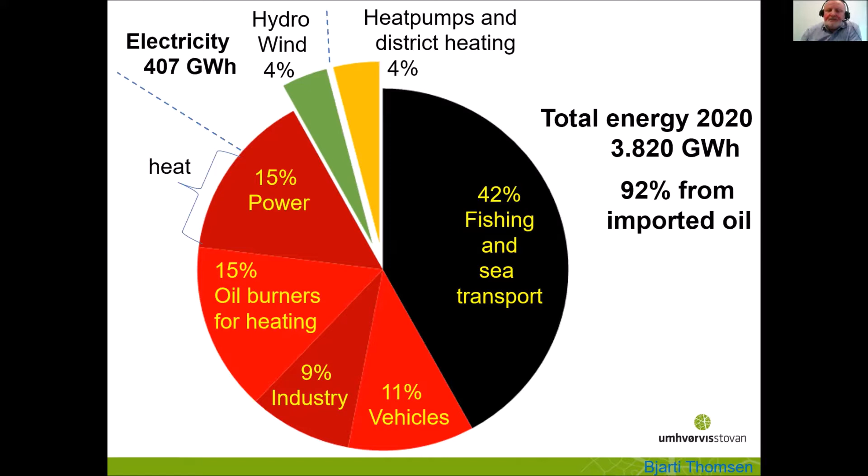And then power production is based mainly on oil. But we do have some hydro and some wind, and the wind is going to expand. And we are on our way to electrify all the transport vehicles, all the oil burners and all the power production. So we have the technology to change from oil to renewables. But as we change from oil to renewables for transport and heating, it will require that we almost double the power production.

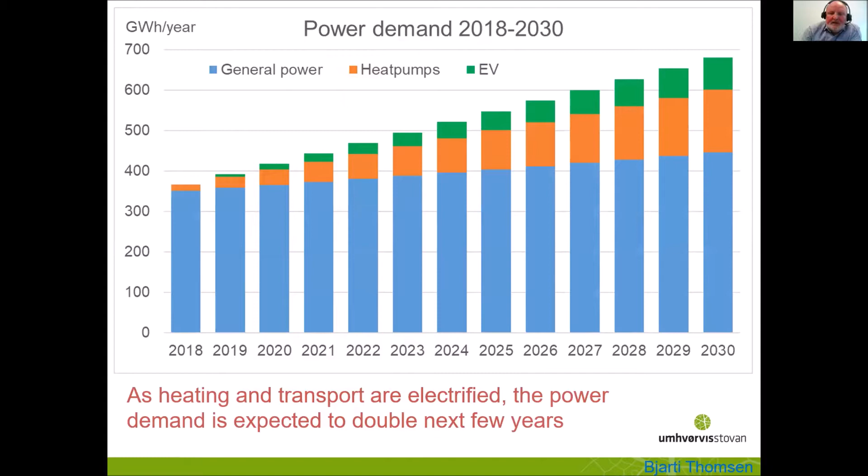And how are we going to do that? That will be mainly made by wind, because we have among the world's best conditions for wind energy. Most places where we can erect wind turbines, we have over 10 meters per second average for the whole year. So our future power production will mainly be based on wind energy.

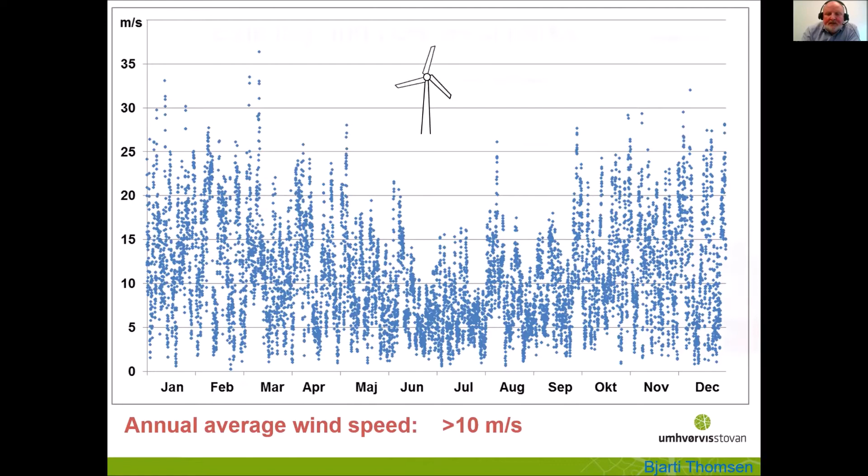And we are on our way. We have 4 small wind farms, and just recently, this year and last year, we licensed 3 bigger wind farms. So they have been committed. So we will actually more than triple the wind energy within a couple of years. But as you know, wind is intermittent and it doesn't produce all the time. It just produces as the wind blows.

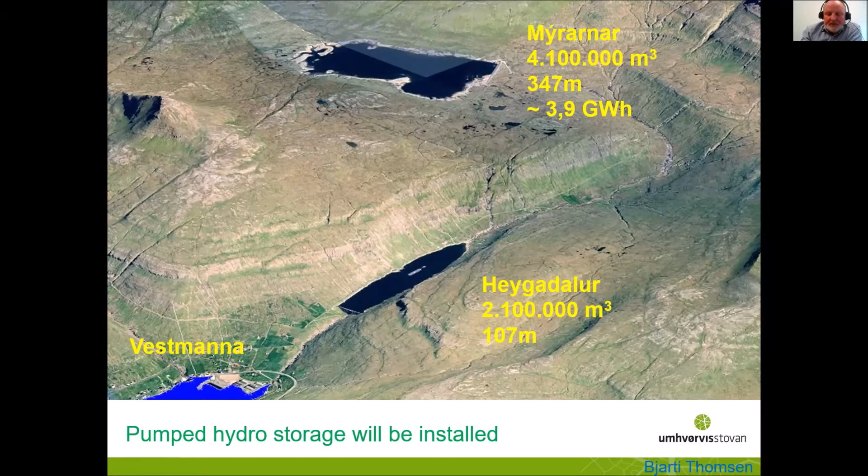So we need energy storage, and we have the option to use pump storage. As you know, most of the energy storage around the world is based on pump storage, where you use excess energy from wind or solar to pump water up to a higher height, and then you can run the water down again when you have less wind or when you require more energy. So this definitely will be an option for us, and we are in the process of building a pump storage in the electrical system. But we do have other options to store energy.

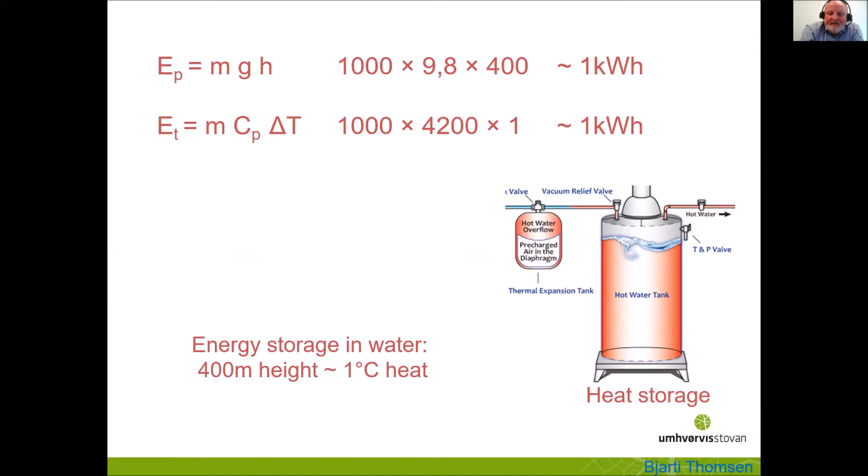Storing heat is a very efficient way to store energy. If you take 1,000 kilos or liters of water and you lift it 400 meters up in a pump storage, or you just heat it 1 degree, that's the same energy. So it's very, very efficient to store energy as heat. And it is used worldwide. We know the big heat storages in Denmark that are connected to district heating systems.

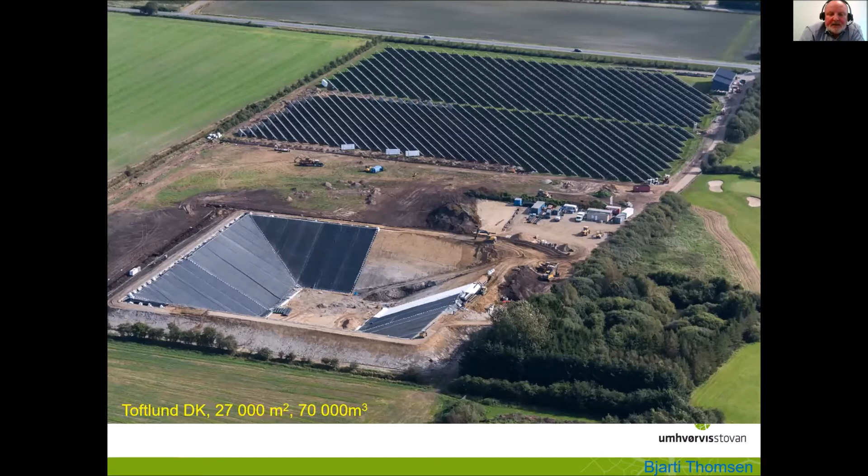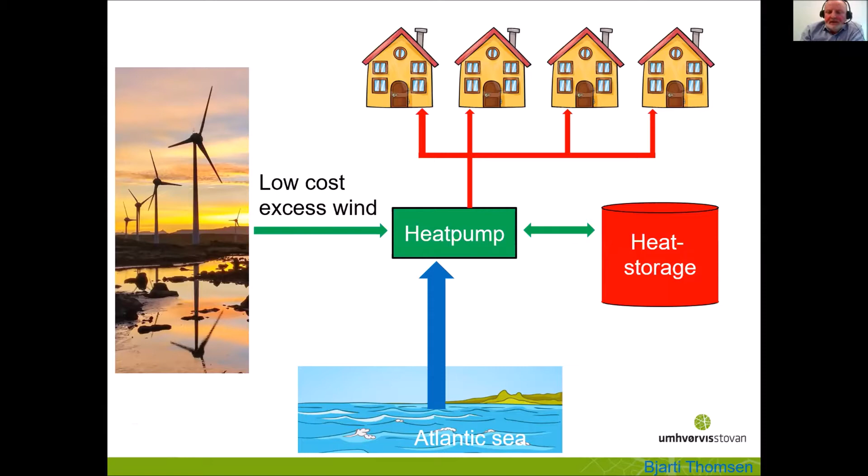And we are going to use similar systems where we can use excess low-cost wind, probably through a heat pump, maybe from the sea where we have a constant heat, and we can produce heat for all our houses, but we can also connect heat storages. So we have the option to store excess wind energy as heat. There are other options, but heating actually is a good solution for us, because the requirements for heating are almost a perfect match with the energy we can get from the wind.

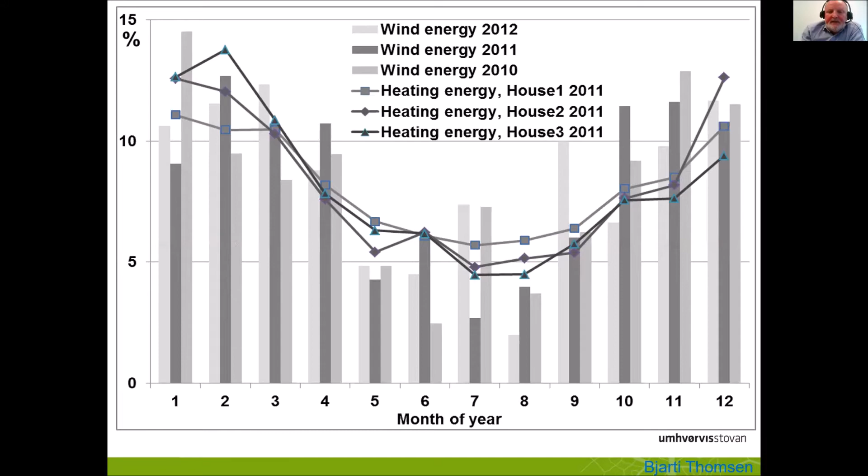We do have more than doubled energy from wind turbines in winter compared to summer, and that's exactly what we need for heating. We need more than 2 times on a winter day compared to a summer day. So there's a perfect match between required heating and the energy that we can get from the wind.

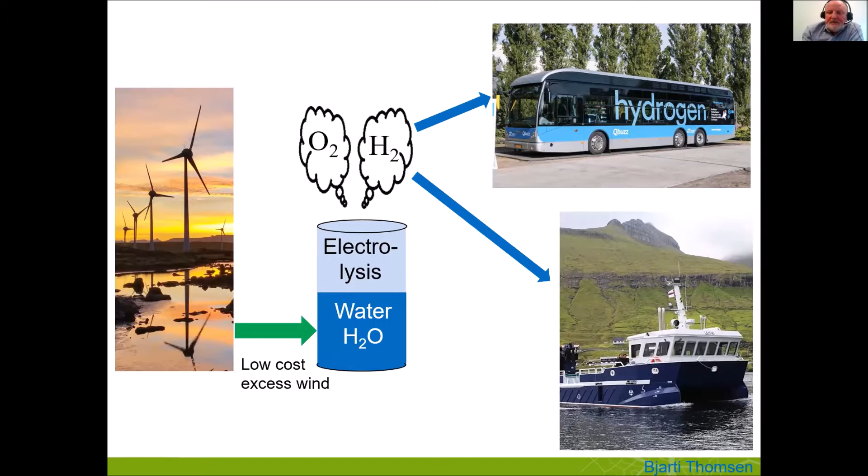There are other options. We of course look into hydrogen, where we can use excess wind to split water up in oxygen and hydrogen, and we can use the hydrogen directly for buses or car transport, both on land and sea. But we are also aware of the option that we can combine the hydrogen with the nitrogen of the air, so we can produce ammonia, which can be used directly as a propulsion energy for engines.

And this figure is actually very interesting for me because we can see that we do have wind and we have water and we have the air, and these are all things that we do have in our environment. It's actually prospects that we can produce our energy from all the things that we do have in our environment.

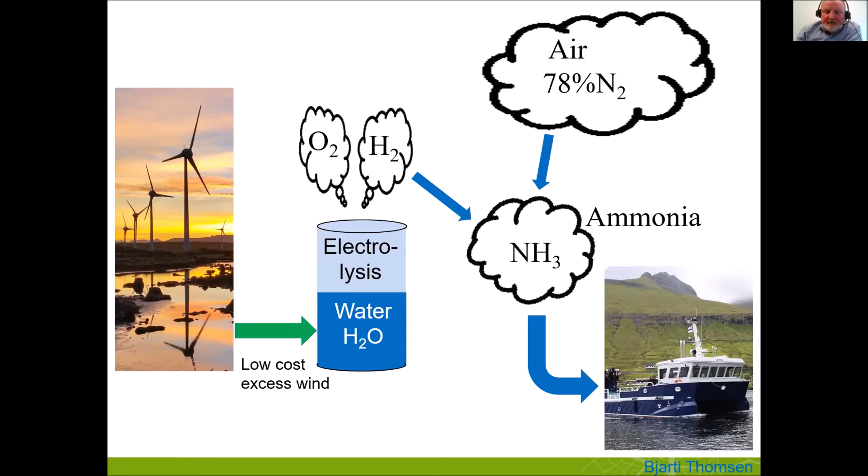So now I will switch to this small project that was part of our journey from oil to renewables. It started as a Nordic Council project back in 2006, where we had a look at this island of Nólsoy, a small island just outside Tórshavn, and we wanted to make this a renewable energy island. The Nordic Council project ran into the sand, but there were some local initiatives that wanted to carry on with this project. So there was a wind mast erected to get 3 years of wind measurements.

And then we also looked into the energy use of the houses. This is a typical house, and we can see the heating requirements. It's, as I said, much more during winter compared to summer, whereas the electrical power is more constant through the year and much lower in energy use than the heating. So if you want to become green or use renewable energy, it's important to transform the heating from oil to renewables.

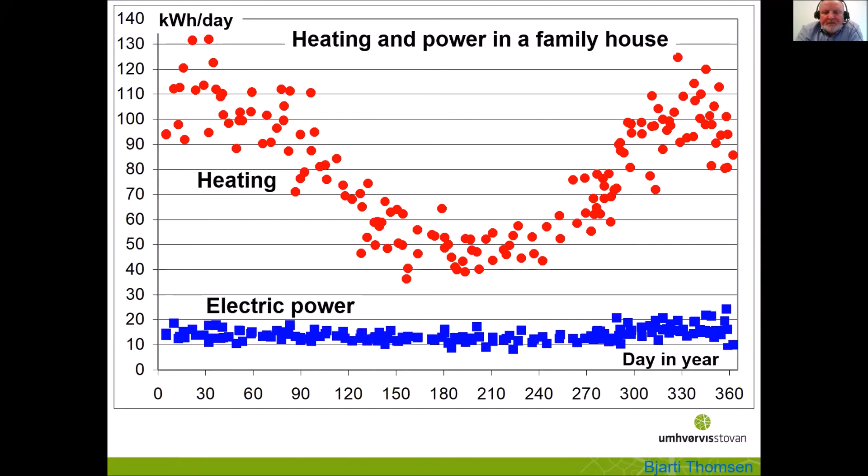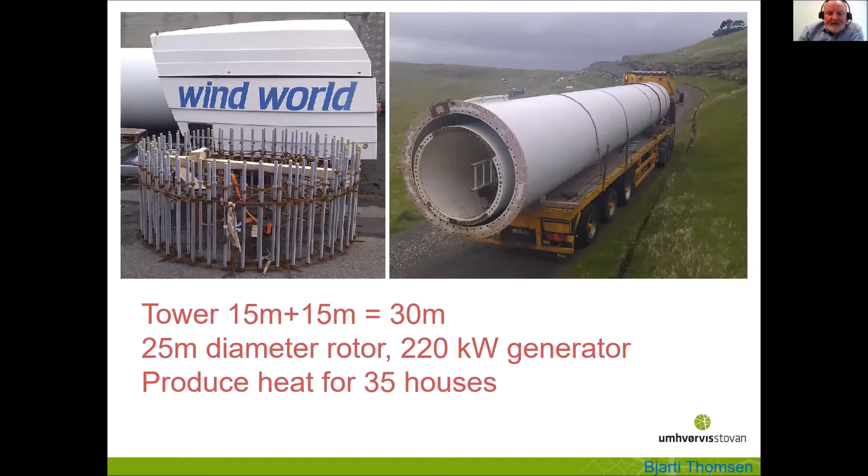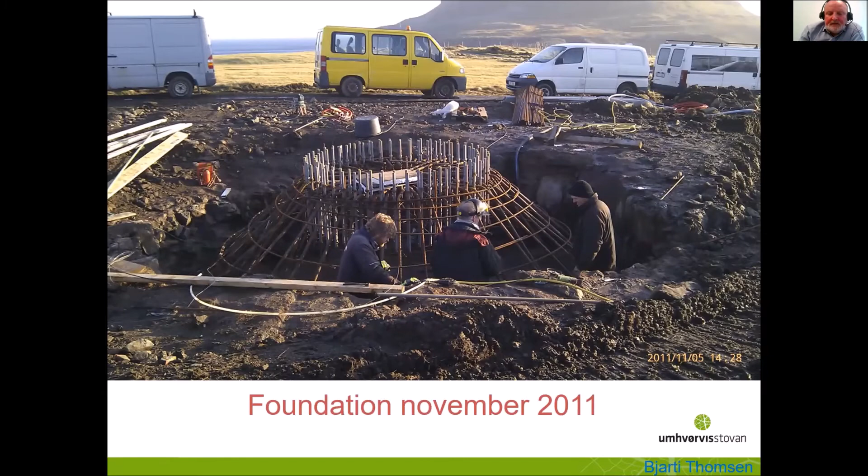So on this island, a second-hand wind turbine from Denmark was bought. It is a 220 kilowatt wind turbine that was built in the early 1990s, 30 meters tower. And according to our calculation, it should be possible to produce heat for 35 houses. So with local participants, we made the funding ourselves back in 2011, and the wind turbine was erected in late 2012.

And also the water storage was built. It's a used oil tank that was put upside down, and it was around 40 cubic meters. And if we operate between 50 and 100 degrees water, it compares to 2000 kilowatt hour storage. And cables were put into the ground, and the hot water pipes from this tank were connected to a few houses in the vicinity of this tank.

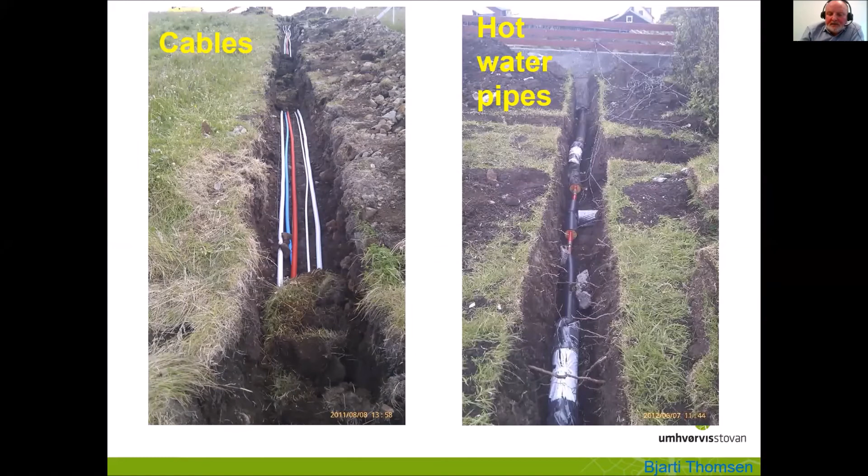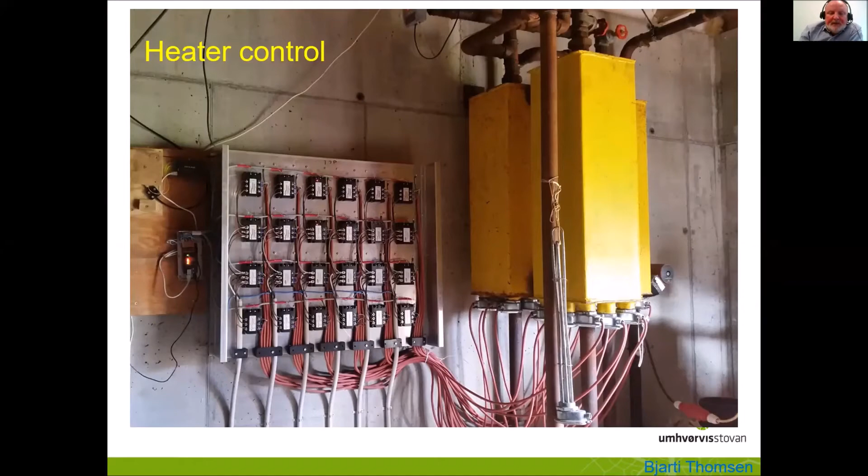And the electrical system was put up, and these are normal resistive heaters in this yellow tank, and we do have relays that can control these heaters and switch them in and out according to the available wind energy. And here's the electrical system. There are some technical details that maybe some of you might be interested in.

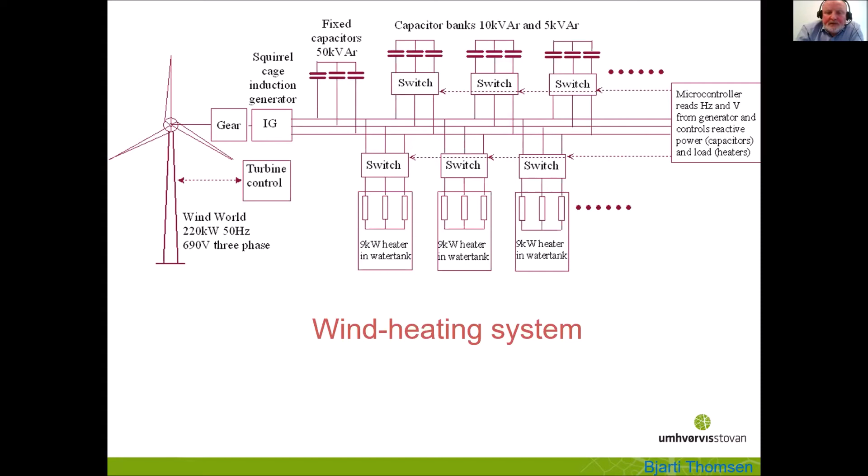But the problem is the start of this, because this is an induction generator, so it should self-excite itself, and that's the problem. That takes time. And this is actually the problem that we have run into. When we have little wind, for example, 5 meters per second, we can control it, and the voltage comes up slowly, and we can control it over to the operating area of 50 hertz and 690 volts. And that is also possible for 7 meters per second.

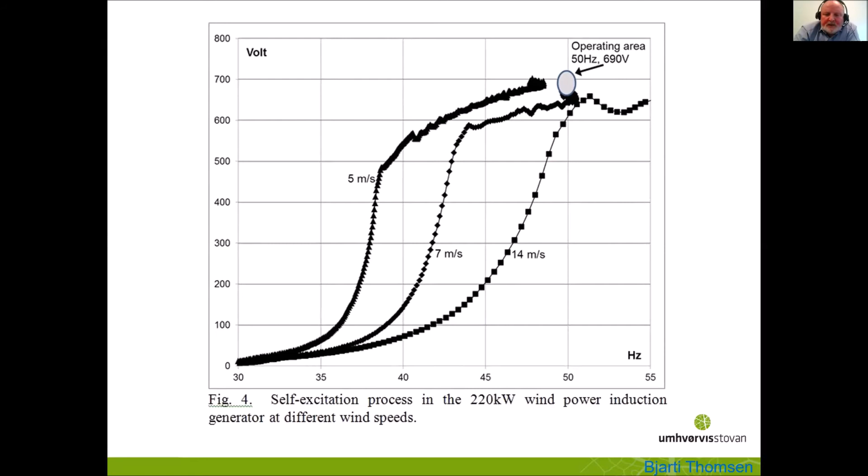But if we reach 14 meters per second or above, our experience is that the voltage is too slow. So we don't reach this 690 volts, and then we have no option to control the wind turbine. So this actually is still the problem, that we cannot start the wind turbine when the wind is too high.

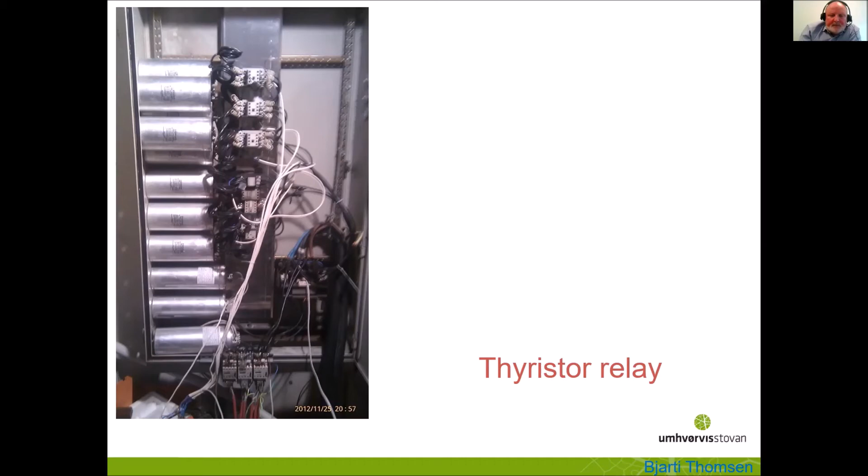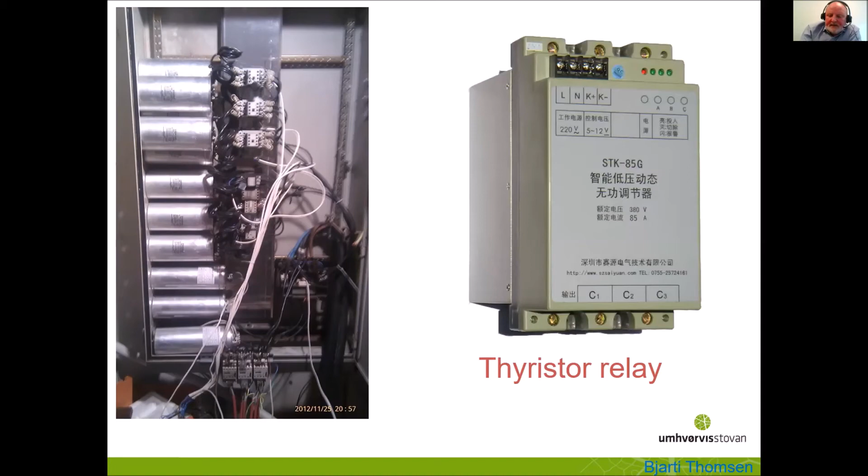During the development of this project, we have looked into a lot of different details. We started off with mechanical relays, but to control the wind, we need a very fast operation. And then we found some Chinese thyristor relays that can switch the capacitors in and out. That's not a simple task. It's actually very difficult.

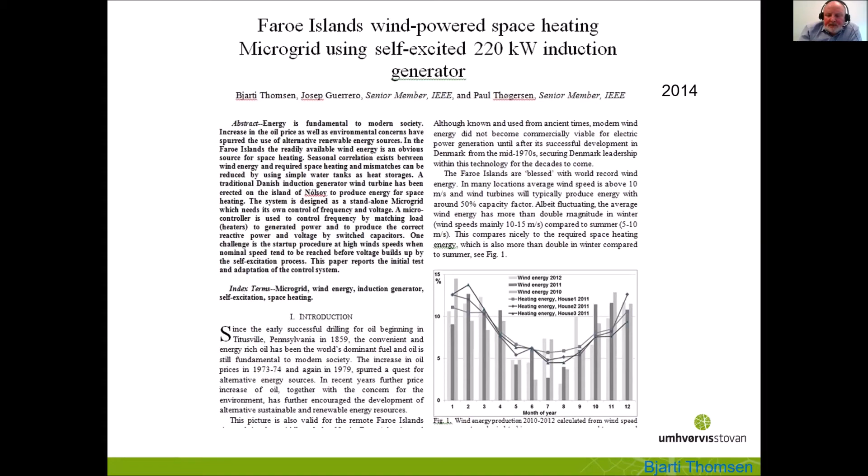This project has been reported in a paper back in 2014, and if you want to see more details of this, you can read this paper from 2014. It was written together with Professor Josep at Aalborg University. We have been able to produce some heat, but as I said, we still have problems with the startup of this wind turbine. So that was my quick overview of the situation in the Faroe Islands and this particular project in Nólsoy.

Thank you very much, Bjarti. It was really interesting. There might be some questions for you now, or we can also say that there's one more presentation and then, no, okay, sorry. Yeah, there'll be questions for you now, and please, if anybody has questions for Bjarti Thomsen, please raise them.

I have a question for Bjarti. If I looked at your slide, you have a wind turbine of 220 kilowatt, but you're trying to control it by connecting resistors of 3 times 9 kilowatt. Do you not run into a lot of excess power in that case? Because I understand that you have an isolated system where you're not connected to the local electrical grid. Is that correct? No, you might have missed my...

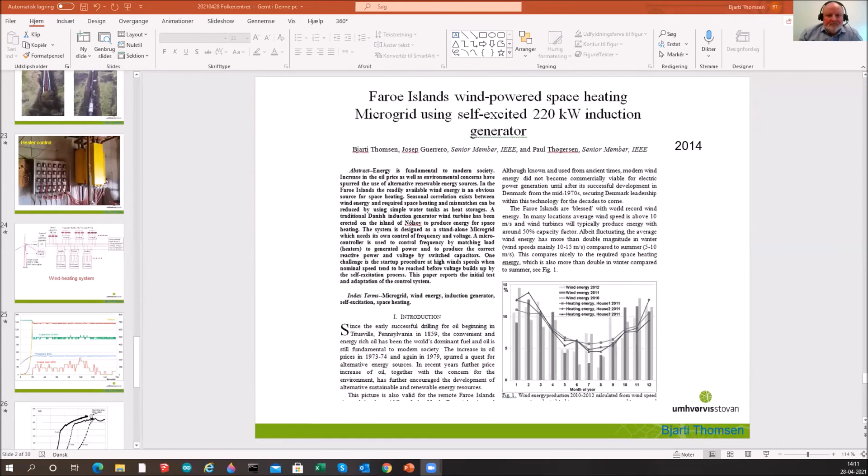If I can show you the slide again. You see my slide now? Yes. I only show 3 times 9 kilowatt, but you see the dots, so we have many more. Okay, then I understand it much better. Sorry. And we have experience. We started off with a total of 250 kilowatt of heaters. And that was not enough; even if it was a 220 kilowatt, in short intervals it produced much more. And we ended up with heaters of 350 kilowatts. And then we could manage all the wind gusts. Okay.

Is there any possibility to connect it to the local power grid, or is it too weak in general? Well, of course, we have tried different solutions to get it up running more constantly. And one of the solutions was a meeting with the utility company that has the grid in the vicinity. But that was a very expensive system. We had to buy a transformer from our 690 volt up to the 10 kilovolt line. And they were very precautious. They said if there's any disturbance, we have to disconnect you, so we didn't think that was a way forward. Okay. So it was a general animosity from the utility? Yes. Okay. Thank you.

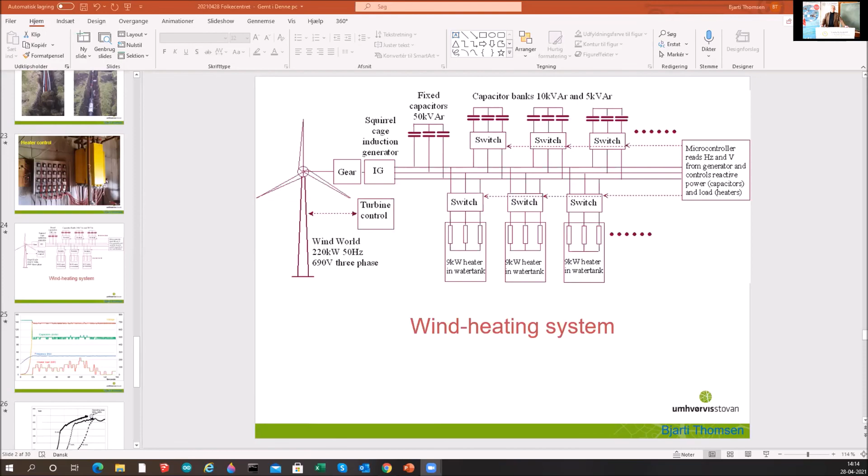Yes, morning. Alexander. I have a question. What happens when the wind turbine is out of service because of maintenance or any outage? What happens with the hot water storage for the community, and how many days can the storage supply the demand? Yeah, that's correct. We do have this water storage of 40 cubic meters, and that is to take out all the variation in the wind. And if we have no wind for, say, 3 days, then the water tank will be too cold, and then we need some sort of backup system that could either be an oil burner that we used before, or a heat pump that is run from the mains from the utility. Okay, thank you.